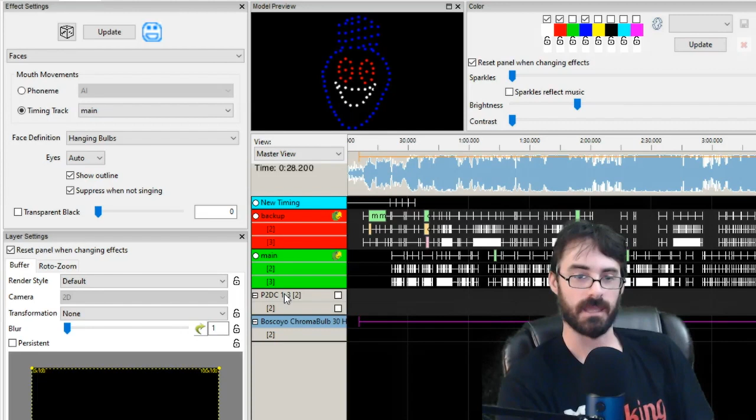So really quick, I'm just going to show you - it's really this easy. It's easier if you go down to the port level, and the way you do that from the P2DC's perspective in X-Lights is to go to the node level. So you're just double tapping until you get to the string, and then from the string you go to... let me just delete that really quick.

Then you go to the node, so node again, and again I colored them - port 1 was red. That really helps me later in the sequence tab to know, hey, if I'm on node 1, I don't have to rely on the name because it might change, but I know that red one is port 1. This is just the easiest way I know how to do it.

So right now I'm not outputting to the prop, and I want to add that - I want to make sure the prop is moving when he's singing. The easiest way to do that is just to take this... oh, I'm in the way, let me move. There you go, now you can kind of see what I wanted to show you - hopefully my cursor is visible now.

So now that I'm in X-Lights and I've got my singing track already here - it's the main track, and it's already set on the bulb - I can just copy that and go right over to the node level here. I'm just going to paste that right in.

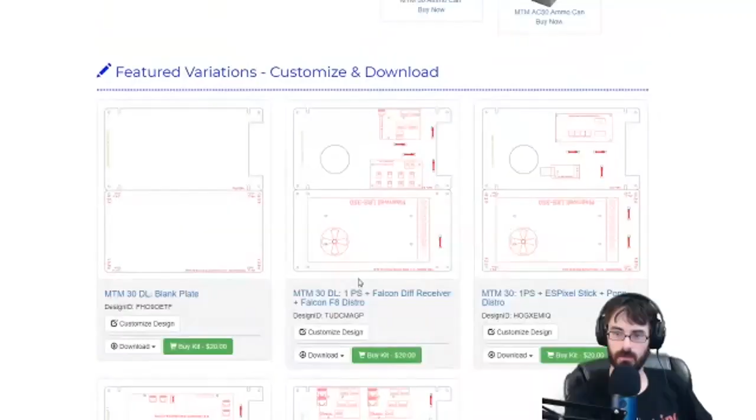So now I'm in the customize tab Jason was just talking about. You can move everything around, say, 'I'm actually going to only use one power supply,' and keep it uniform by putting it in the center here. You actually have tools here to help keep it centered.

I noticed that recently. Yeah, that was a new feature we added this year, along with allowing you to make square or round holes down to the millimeter size now. That was also a new feature released this year.

Honestly, what's that—the resizing thing here? Right, if you click on variable rectangle, you can drag it up a little, it drops in the corner, and those are just cut holes. So anything you make in black is going to get cut by the laser. That's essentially as simple as it is.

So you can make slots or circles or things like that if you want wire to come up from the bottom.

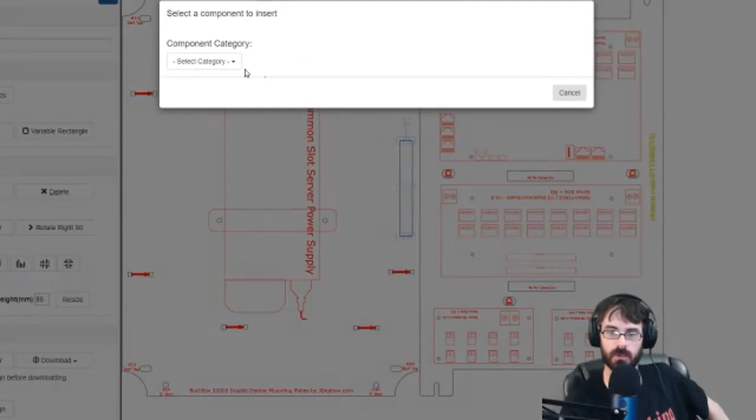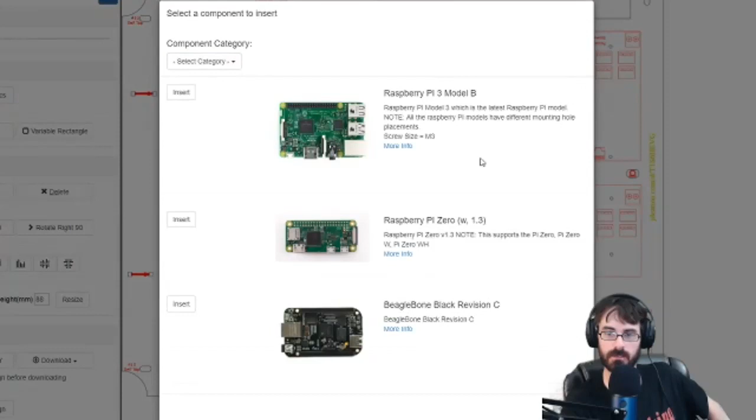I also want to show this really important thing. If you don't see anything here, like if you're using the blank template, you can go to insert electronics and look at all this. I already have existing templates of almost every single controller.

We've got the whole Falcon line, all the new Falcon stuff. We have most of the popular Meanwell power supplies, and we're actually in the process of adding all the Meanwell LRS series power supplies right now, so people can start switching away from just using the 350 watt power supplies and start leveraging power supplies more suited to their actual power needs at the prop they're trying to power. We're adding those into the tool now, hoping to have it done in the next couple of weeks.

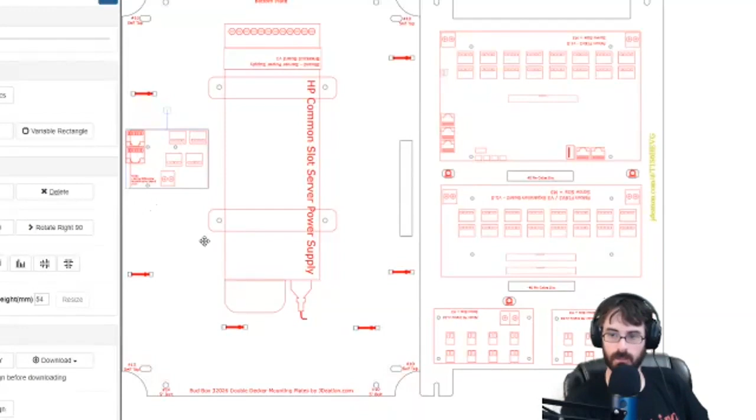Wow, that's great. Yeah, the customizability is great. So now I'm here and I can save it for later, or download it—I have to save anyway. There's this little warning here, and then, yep, see, now it's automatically been saved to your My Designs library.

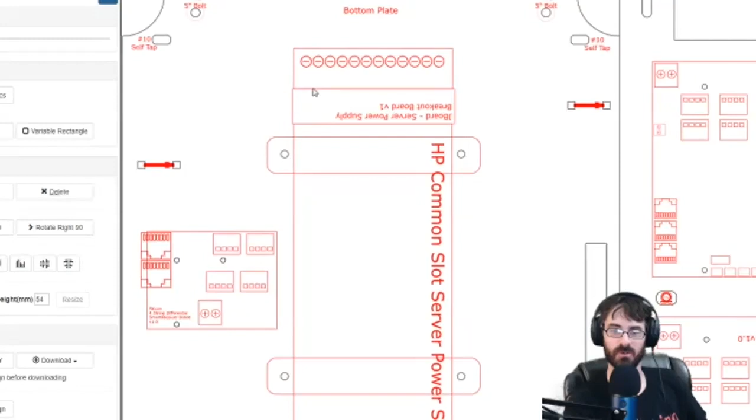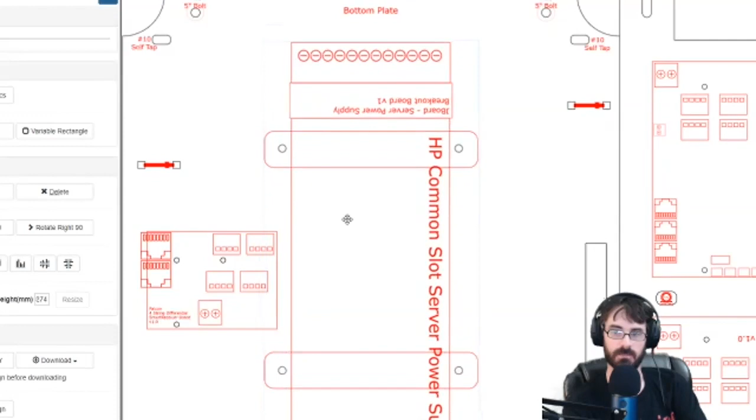That's probably one of the coolest things about this, that you can experiment without having to make the purchase right now. You can experiment, think about it—am I really going to buy this big power supply, am I really going to have it there? So this is all my different designs. I played a lot with the compact design, I played a lot with the big enclosures, and yeah, it's just great—you can go back through.

I think I have one even from last year or something like that. And they're always there, super handy.

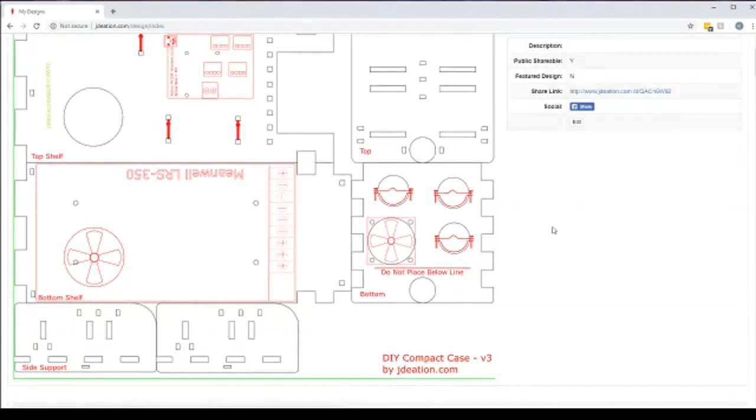I can make a purchase from one of my designs and it sounds like you're all automated and ready to go at that point. So I could go to fabricate the design, and then you get these very easy instructions, right? Yep.

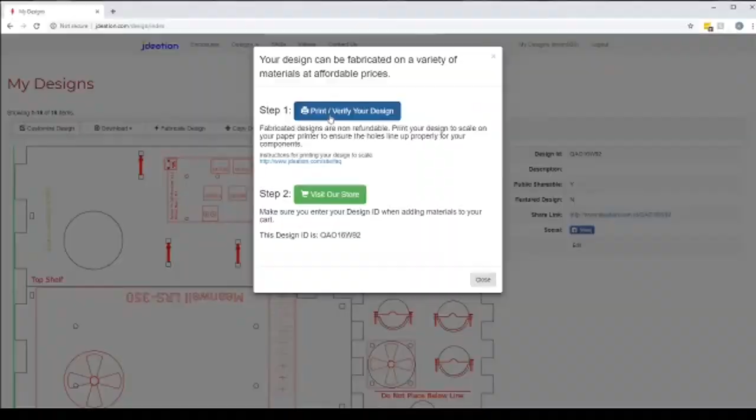We always encourage people to print their design on paper just to make sure everything lines up to your actual components. Occasionally, like with a lot of the eBay components, if you're using a buck converter or something like that, those eBay parts change almost monthly, and they just call it a buck converter. So it's hard to keep up with exactly what's being produced by the Chinese manufacturers. We always encourage people to print and make sure if they're using some eBay type of component that the holes are going to work for it.

Yeah, it's so funny you mentioned the buck converters. Thank you, brain fart. Because that's the problem I ran into too. I knew I could have just printed it out beforehand, laid out the template and seen if it actually fit with my electronics already, but I didn't do that. So don't do what I did, listen to Jason. Well, you're not the only one, I can assure you.

I think, in fact, we may have to take some of that into account. We only have a few non-standard components. Most of the stuff we have is either Falcon or Meanwell or brand name kind of stuff. We may end up taking some of the eBay stuff off, or putting it into a special use-at-your-own-risk kind of category where it's more obvious that you definitely want to double check this stuff.

Yeah, it was my mistake. When you go into the fabrication thing, the first step is, hey, do yourself a favor, print that thing out. But oh my God, I don't know if you could tell everyone, I'm in love with this company, I'm in love with these enclosure designs. Good, thank you, appreciate it.

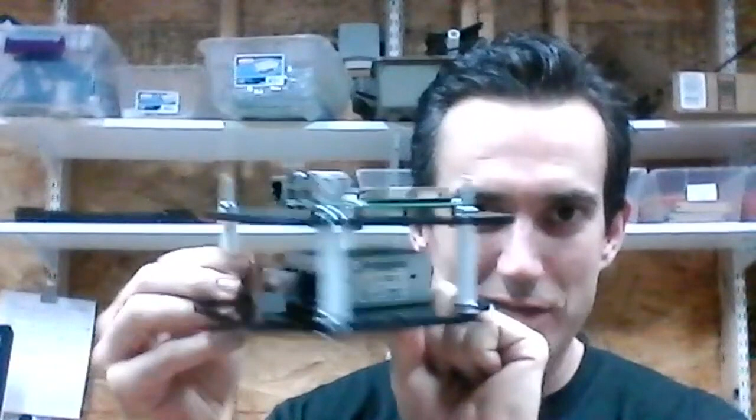I don't know, I've already failed once at this, but if you can just see this one, this is a Budbox 32010. So this is just the inside plate I've got. You can see it's a little tiny power supply down here on the bottom, and I've got this for my Raspberry Pi. I was going to use this for my own show to run the show.

But we're releasing a whole line of Budbox enclosures that are smaller sizes, so that you can maybe get a 100-watt power supply to fit in this little guy here. For a lot of folks, if you've just got a couple of props, 100 watts is all you need. And that way you can maybe even attach something this small to the prop itself, totally hidden away.

So that's kind of what we're working on right now, really trying to move away from these giant enclosures where you have to run a bunch of wires across your yard and run power injection, to try and get the power at the prop. I think that's the term I'm going to try to start using.

But where do I see it beyond that? I view this as a weatherproof enclosure that could be used for any industry. I think that's going to be our next logical step, to really start spanning out into other industries, other niche industries, other wider industries. And then I think there's even an opportunity for this in the maker community.

If I just want to run a Raspberry Pi and have a really nice enclosure, versus just sticking it in a plastic box, I think there's an opportunity to use this. We've got to make sure our process can handle it from a fabrication perspective. I haven't had enough time to expand this thing yet, but that's where I'd like to take it. Whether it actually happens or not, I don't know, but that's where I think it could go.